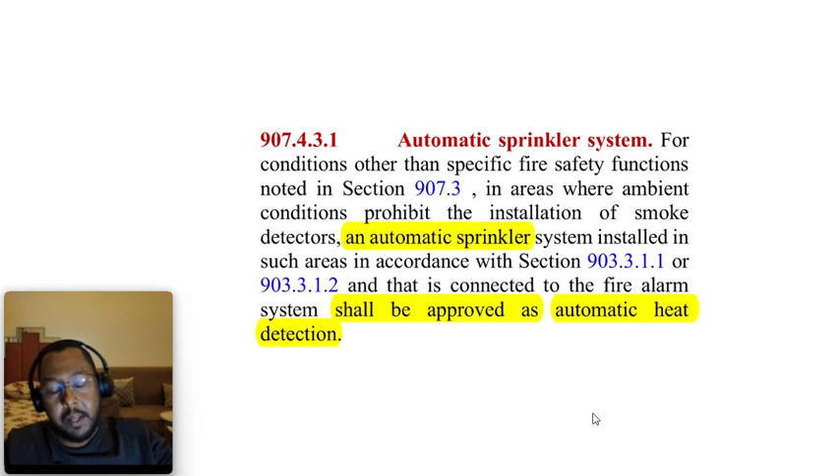There is this clause from IBC and SBC that basically allows the use of automatic sprinklers as a replacement to heat detectors when smoke detectors cannot be provided. And the discussion always comes that if the heat detectors usually operate at 58 Celsius degrees, while standard sprinklers are activated at 67, then there is a time difference of 9 Celsius between the two, and this means that there is benefit to be gained by using heat detectors in terms of response time, activating the emergency action plan, and so on. And the debate is always that there is no benefit or there is benefit, and the discussion keeps going on and on.

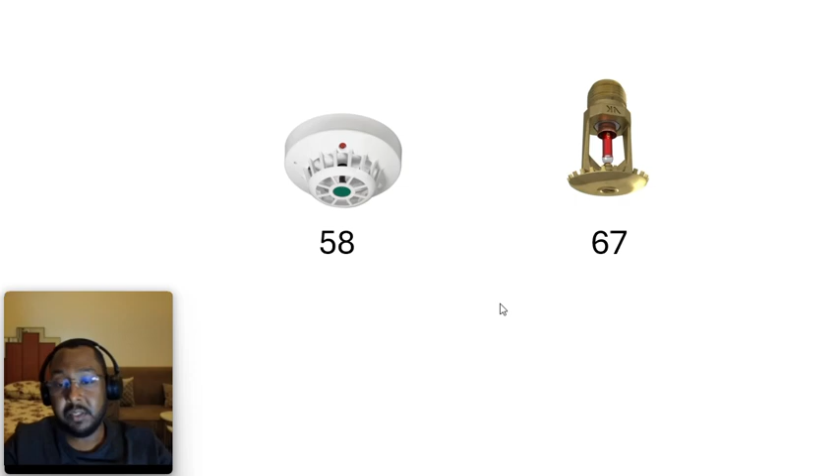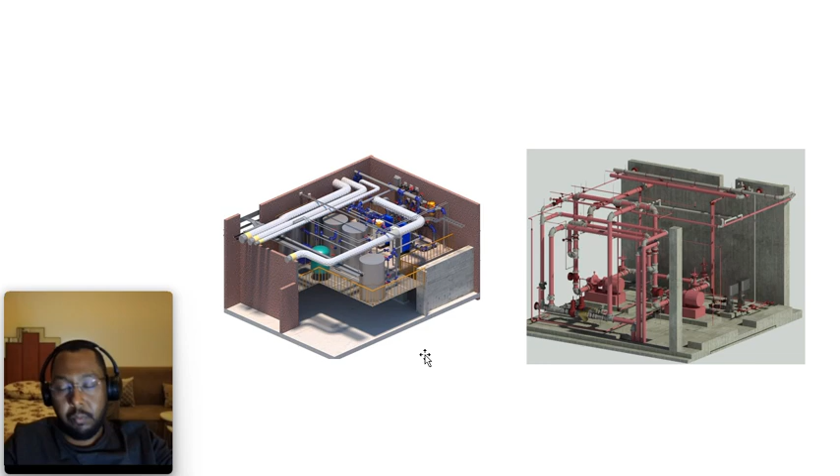I have tried to do this study and get to the bottom of this, and I have made the study around MEP rooms basically because those have a relatively small area and control area, and the heat release is not massive. So I believe this will be a very good sample to build a study around. And I made this LinkedIn poll: what do you guys think? What is your opinion about this? And interestingly, 3 out of 4 engineers believe there is benefit, there is gain. The majority believe yes, there is clear benefit, while others doubt between minor and not sure. And only 1 out of 4 engineers doesn't see that there is time gain between the two.

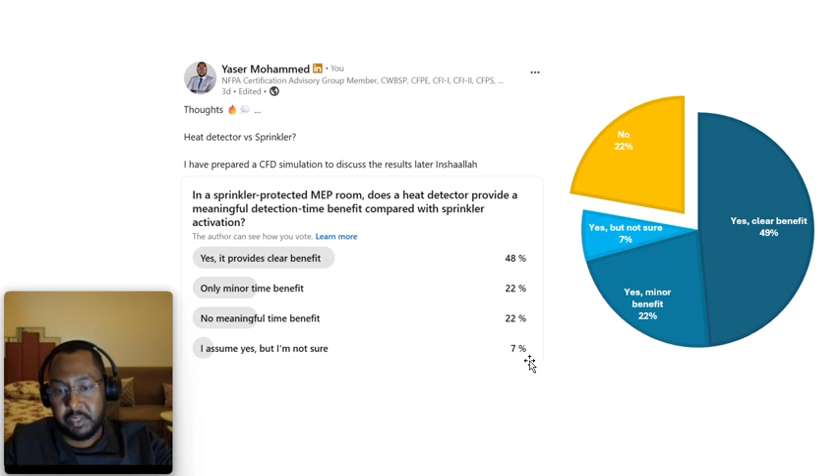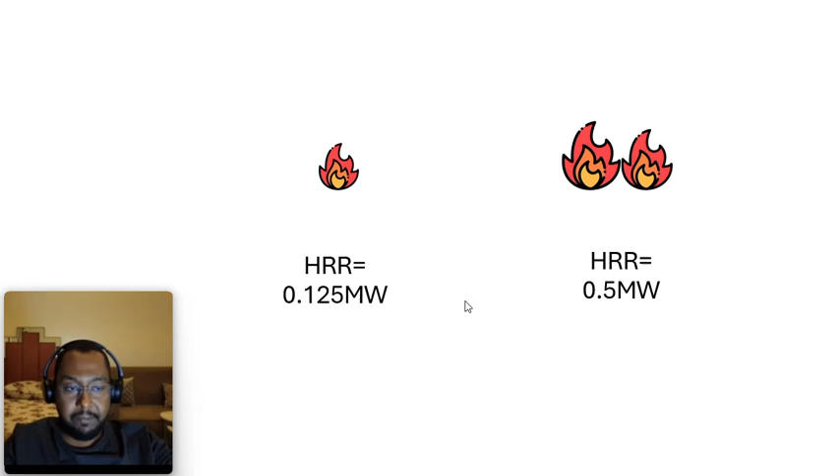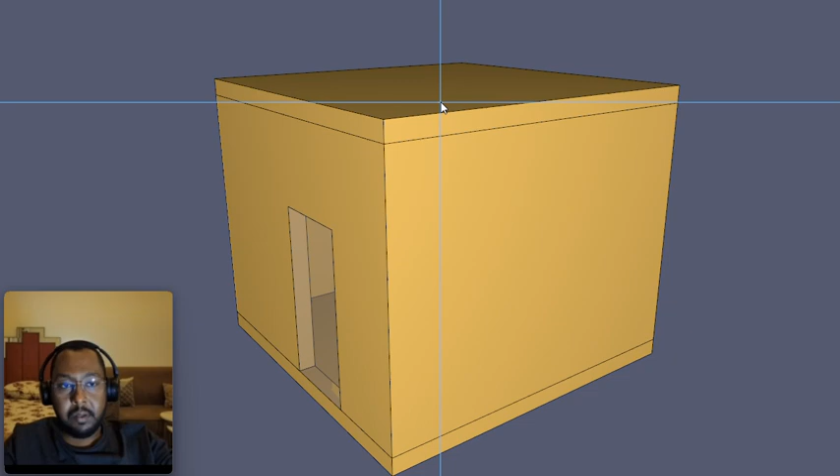So I did the study. I have used 2 different heat release rates just to see the trend and how the heat release rate can affect the detection times between the 2 different devices. I have used 3 different RTIs also to study the trend between the two, and I have built in PyroSim basically an MEP room 4 by 4 by 3 height. It has an entrance and a minor vent at the back, and it has only 2 devices at the ceiling. Let's hide this, and we can see the automatic sprinkler and heat detectors at the ceiling and our burning object at the bottom. So jumping to the results,

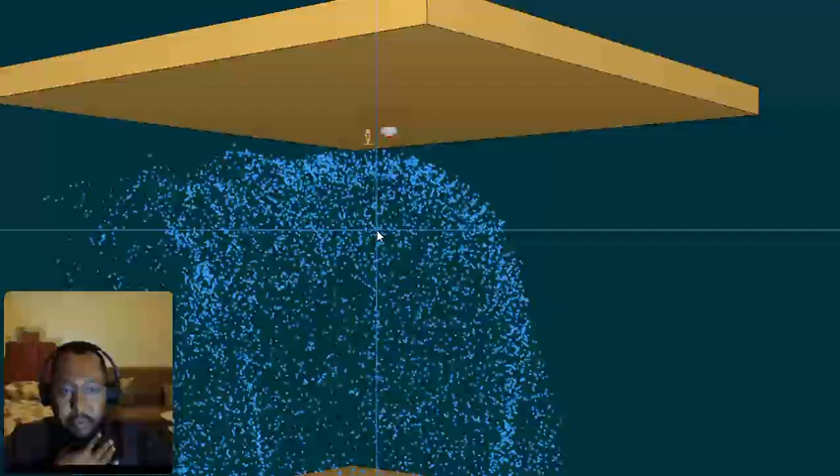you can see the smoke and the fire. I will hide the smoke because it will fill the room, and then we cannot see the water particles. And if we zoom in, you can see the heat detector kicks in now, and then the automatic sprinkler will be activated. And then I will jump into the results immediately. Let's look at the results.

The results show that when we use 0.125 megawatt, given we have 3 RTIs, the time difference is something between 12 to 6 seconds, averaged at 9 seconds. While when we used 0.5 megawatt, there was no time difference detected between the 3 RTIs, and it averaged around 3 seconds. And this basically tells us that there is no time gain between the two, 9 seconds or 3 seconds, 6 seconds. There's not a massive difference. It is not 30 seconds, 1 minute or 2 minutes. And substantially, there is no difference on the emergency response plan and the action plan. At least this is my opinion.

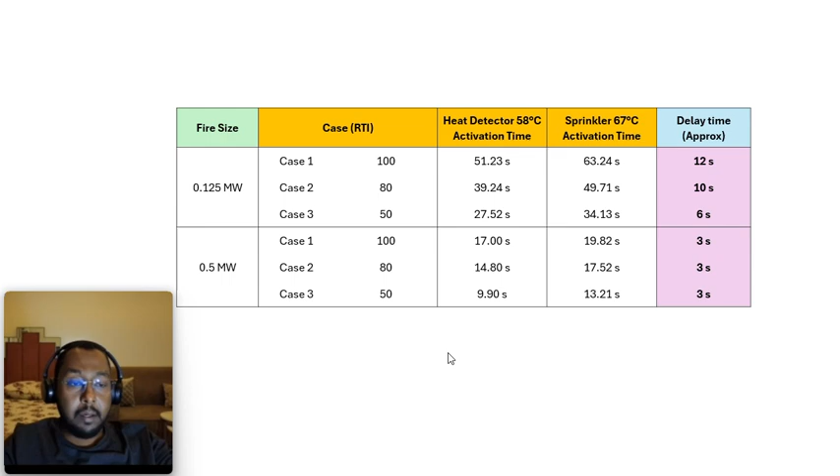So the way I see it, this study is concluding that there is no major difference, and thus we can eliminate the heat detectors, save the cost, save the time, save the installation, save the maintenance, and save all the related expenditure to the heat detectors. And then we can maintain the sprinklers to basically do the same.